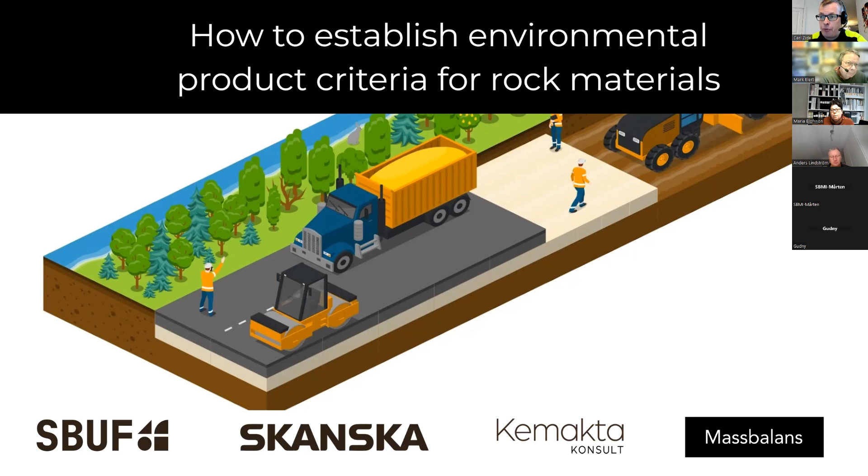And today, this project that Mark is heading under the guidance of Skanska is about creating environmental product criteria, a risk model for this, and that's the topic for this meeting. This is kind of a Nordic outlook, and we would like to invite our colleagues in other countries, and we are very pleased to have kind of a dream team when it comes to risk assessment. We have Jussi Reinikainen from the environmental institute,

what we call in Sweden the environmental agency. And we have Timo from GTK, in Sweden we call it SGU, or equivalent in Norway and Denmark. And then we have Gudny from Norway working at NGI, the Geotechnical Institute there. And we have also Ole Hjelmar, who is from the Danish Waste Solution Company, but he is very famous for driving the European end-of-waste efforts in the early 21st century, 2005 to 2013 or something like that. So we are very pleased to have a great team that will guide us through this day, and they will also do some introductory presentations about how they view this topic.

So here are the questions that we sent out, and of course the conversation is open and we can direct it the way we please. But it is to establish a risk assessment model for a specific product. Rock material is what we are aiming for, but other products could be beneficial to discuss if we have experiences from them that could help us with rock materials. And also to investigate and define the specific product, the use case, the characteristics, etc. After that, we have other questions that could be interesting, such as the longevity, end of life of roads, the placement of those roads when we have a common recipient, and what happens when disaster strikes, when we have a mud disaster like we had on the west coast in Sweden.

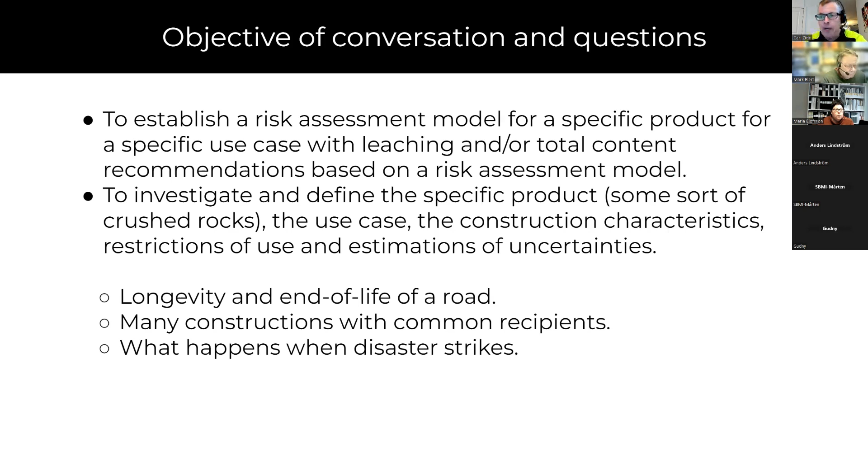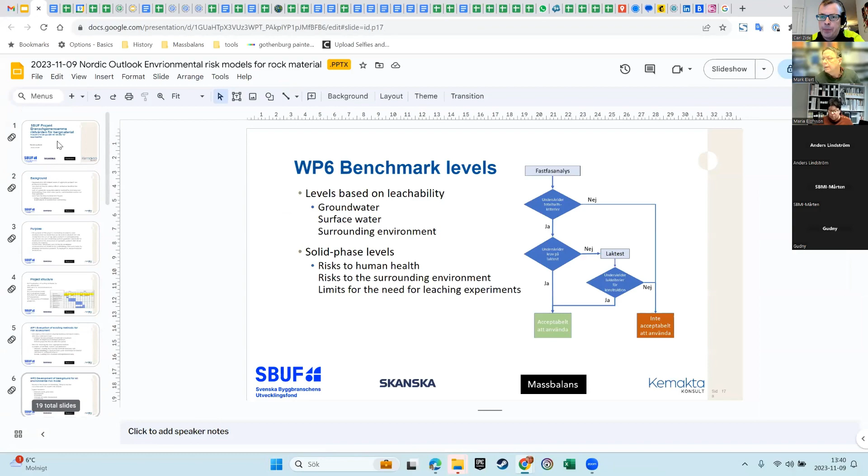So we will start with Mark and Malin, who will do the first presentation. And then we follow this list. We are open to questions and remarks during the whole conversation, so if something is unknown, please bring it up at once, so you don't sit and wonder. So Mark, I think you can start. Malin is hopefully joining us later on. So I will change to your presentation. And that is here, from the beginning. Please, Mark, and please introduce yourself as well. I haven't done that properly. Your microphone, please.

Yes, I'm Mark Elert from Kemakta, and I think I have met most of you, at least on Zoom. I work at Kemakta, and I'm trying to do the hard work, developing the model and the values here, with help from my colleague Karin Norrfors, who has also been working with this type of questions before. A few words about the project, because Malin is not yet in. No, Malin told me that if we can do it instead, that would be great. Would you like to do that, Mark? Yes.

A little bit of background. Approximately 100 million tons of aggregate products are produced in Sweden annually. And it's of course important that the use of these products would not give negative effects for human health or the environment.

Unfortunately, there is a lack of a generally accepted model or method for assessing the risk of using these types of material. But we know that this is a methodology which has been used in other areas, for example, in waste disposal and contaminated soils, which are similar, but not fully applicable directly to the kinds of things we are dealing with here. And as Carl mentioned, there has been a project testing various types of rock materials, which is, of course, a good basis for this project.

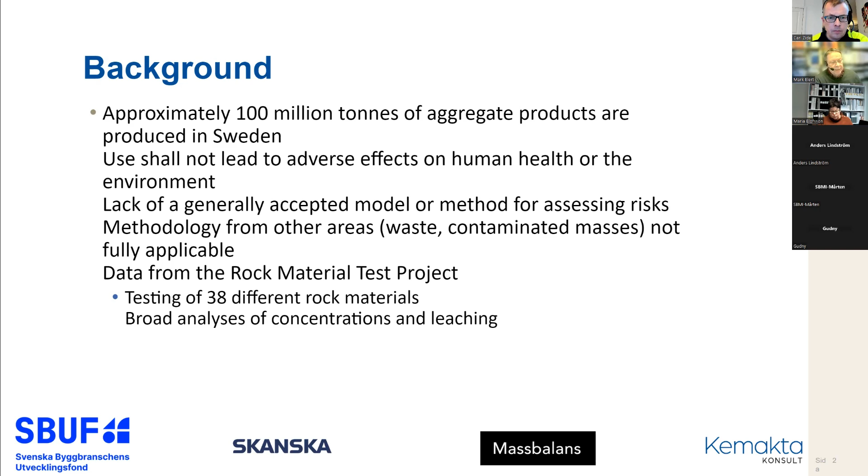We have tests from about 40 different types of rock materials. And from these tests, we have a broad analysis of concentrations and different kinds of leaching tests which have been done. And we intend to use that as a basis to see really how this material will act when it's used in constructions.

So what we want to achieve is to develop an industry-wide environmental risk model that can then calculate risk using these aggregate products in various civil engineering aspects. In the project, what we want to do is to have some uniform guidelines and levels for the environmental risk assessment that can then be used by the industry and also, of course, accepted by the authorities.

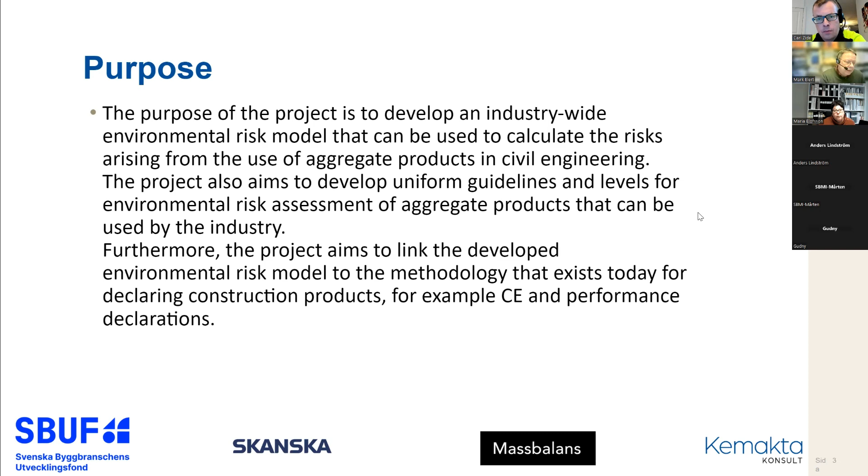And we also want to develop a risk model that should be connected to the methodology that exists today for declaring the safety and usability of construction products, for example, the CE marking and the performance declarations. So we're heading for some kind of product that can be used as a product. You can take the next one.

The project is divided into 7 work packages. And we have a time schedule which will last until a bit into 2024. And we have a reference group which will have regular meetings, and there will also be preliminary reports at various instances. And we also have this project group who have regular meetings discussing the progress of the project. Going a little bit more into the content of the various work packages, you can take the next slide, Carl.

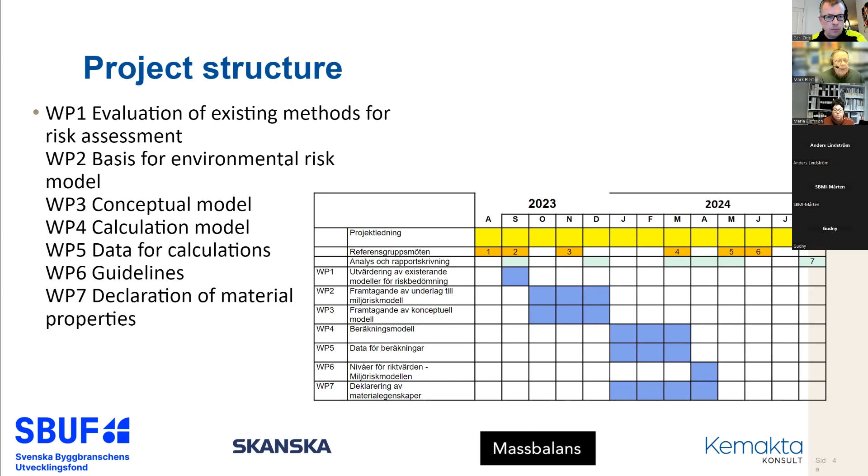The first work package is basically what we're doing now. It's an evaluation of the existing methods available for risk assessment, describing the current status based on literature studies, interviews, and a workshop like this. And what we're interested in is methods for risk assessments of various types of materials in structures, models for how chemical substances are leached and dispersed, and also how different material properties can affect this spread.

For example, many of these rock materials are rather large pieces of rock. It's not like a soil with very fine-grained material, and those things we believe can be important to look into in doing this model. And what we want to do is to find some basis for selecting the most appropriate method for our purposes, something which is complicated enough to answer our questions, but not too complicated.

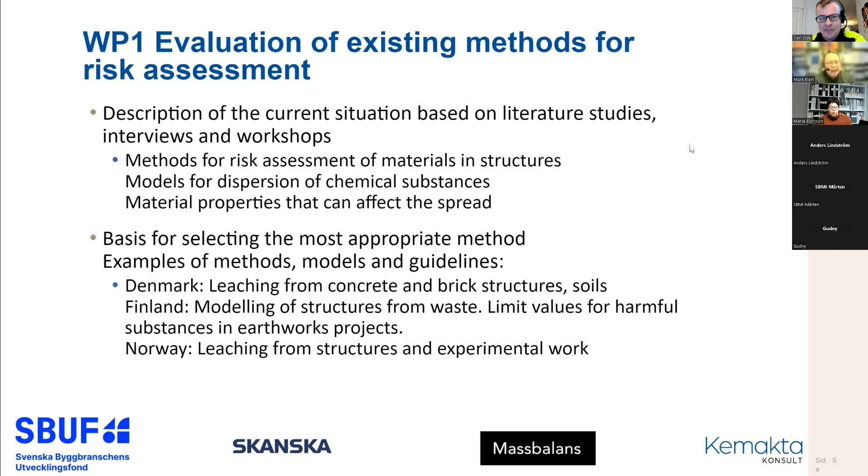And of course, we know that a lot of work on this has been done in the Nordic countries, and that's why you are invited here. You have been looking at various types of waste in various ways. So I think we can have some valuable exchange of information here today. You can go to the next slide.

Then, of course, we need a basis for this model, and to look at how to really, in a broader sense, choose the methodology we want to use. For example, what type of scenarios are we looking at? What type of materials, what type of constructions, what dimensions, how is water dealt with in these constructions, because that can be an important pathway for transport of substances, and also what does the environment look like where this construction is placed.

And of course, you could find a multitude of different scenarios, and we are not able to look at all of these. But since we are trying to develop guidelines which would cover a lot of situations, we will look for typically rather critical scenarios where you have large constructions, etc., and perhaps a somewhat more sensitive environment.

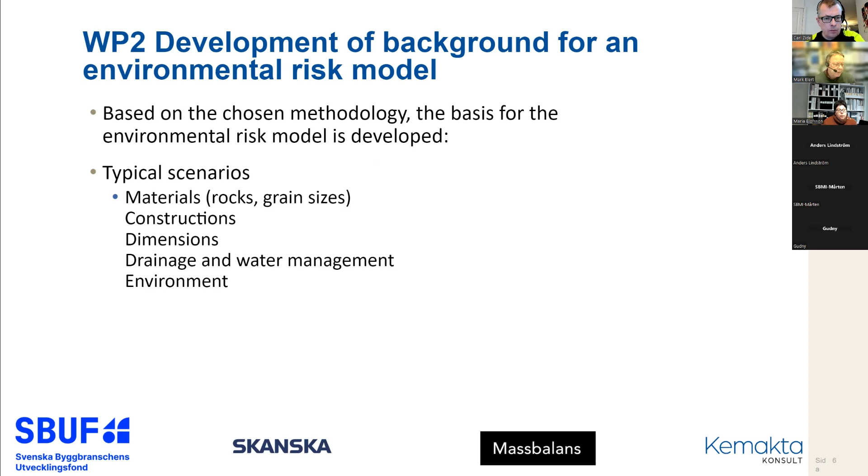And this work has been going on. The next thing is then to develop a conceptual model that we want to use. And we want to take into account, of course, human health, but also soil environment, and of course, protection of groundwater and surface water. And look at different pollutant dispersion processes and exposure pathways.

And I don't know, I cannot point, I guess. No, sorry, I can, please.

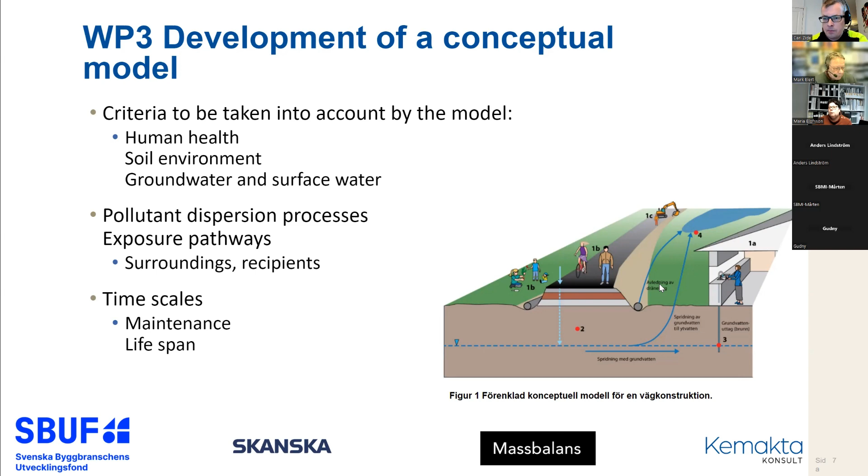And what is also important, of course, is the time scales you are looking at. You are looking at the entire phases. We are trying to look at the construction phase, the maintenance phase, and also the entire lifespan, and to some extent also take into consideration the final destiny of this road. It might be removed or something might happen with it, which we need to include. You can take the next slide, please.

And when we have this conceptual model, this has to be converted into some kind of calculation model. And there are, of course, a lot of models developed for risk assessment. And what we want to do is to have something which would relate to the risks connected to the total content of various substances in these rock materials. But we also want to take into account models which consider leaching, and the effects that can have on groundwater and surface water.

And the choice and setup of this calculation model will be based on what we have in the conceptual model. And for the total content, we are working with a hypothesis to use the same methodology, perhaps not all the exposure pathways or the same parameters, but the basic structure of the Swedish Environmental Protection Agency's guideline model for contaminated soils. And then we need to develop a leaching model, taking into consideration time-dependent leaching, transport, and dilution, which is more advanced than what is used in the Swedish EPA guideline model.

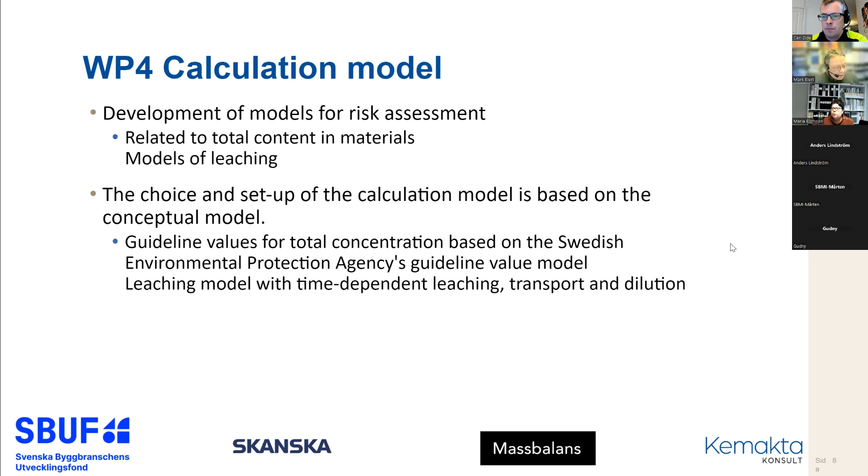How am I with time, Carl? You are fine. I'm fine, okay.

So we need a lot of data. We need data on the rock material, where we have this information from the Berg material test project. We need information about the construction, where Skanska has a lot of experience in building constructions like this and knows exactly the different dimensions and what type of materials are used in different places in these constructions. We need something which deals with the conditions for leaching and the conditions for spreading of these substances. So we need to make some typical scenarios with groundwater levels and groundwater flows, etc.

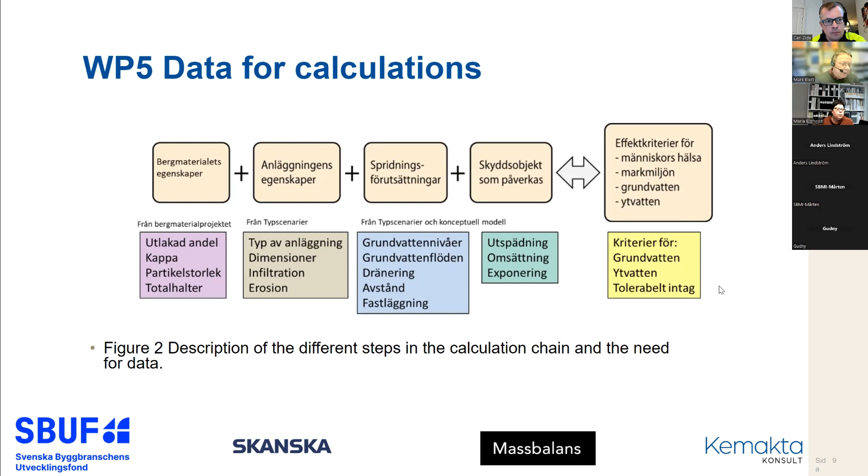And we also have to know something about what we want to protect, what are the relevant types of objects that need to be protected. For example, people living nearby, or the groundwater and surface water. And then in order to base these calculations, we also need to find some criteria for what effects are acceptable for human health, groundwater, soil, and surface water. And there is, of course, a lot of information about that already. So this is the basic setup.

And what we have done so far is we have been looking at 4 different designs. One is what we in Sweden call the 2+1 road. That is a 2-lane road with changing overtaking lanes, where you have a paved surface, and we have assumed a stretch of 2,500 meters and a width of 16 meters and some thickness. We also have a larger impervious surface, asphalt covered, more or less impervious. We also have the same size of surface, but with a gravel surface. And also we have been looking at what happens if you have a stockpile of material, so you have the same area covered, but with a greater thickness. And the idea is that all of these have the same area. So we are basically looking at what the other parameters would affect.

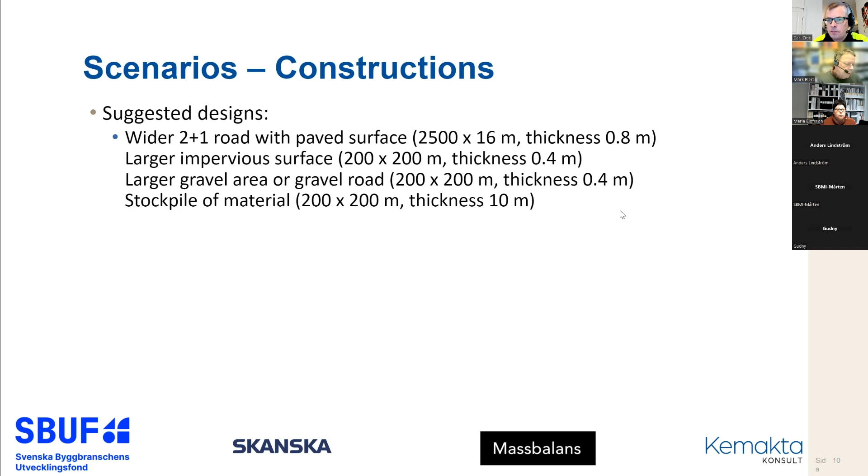And so far we have been using what I call here the Swedish TAC MRR model. MRR is basically what levels constitute a negligible risk in Sweden. And this is the model which has been used to calculate the leaching values for that. It's rather simple and rather conservative, but it's easy to use. So it gives some idea of where we will end up and what things are important. So what we have done is change the dimensions used in that and change a little bit the infiltration rates because we have paved surfaces. We have also made some changes in the flow in the surface water recipient. But basically the other parameters are the same as in the calculation of these MRR values.

But one should remember that it's very conservative. For example, it assumes that you would have protection of the groundwater directly in contact or directly bordering the construction. You would basically put your groundwater well for drinking water just on this roadside, which is probably not a good idea. And it also assumes a very rapid mixing in the soil layer in the construction. And it also has parameters for leaching which are not adapted to the rock material.

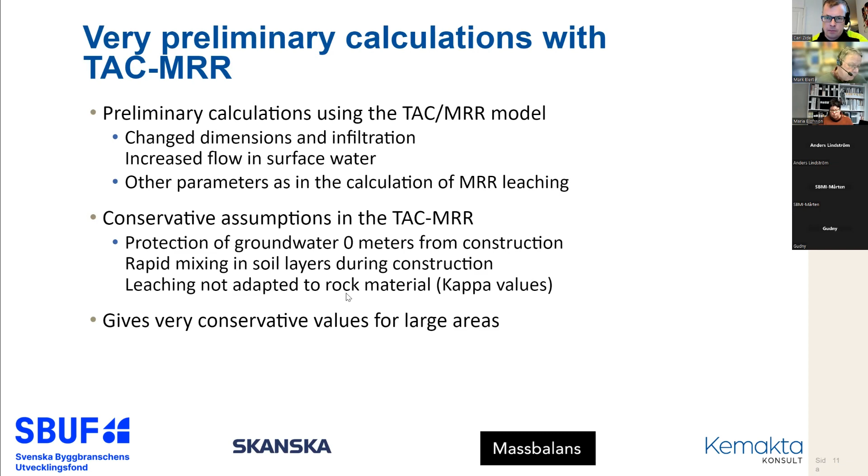We have a lot of information to process from this Bergmaterialstudie, which we have not yet done, which gives some interesting information, and it seems that the leaching is not working exactly the same as is assumed in these types of soil leaching models. So it gives rather conservative values, especially for large areas. You can take the next slide.

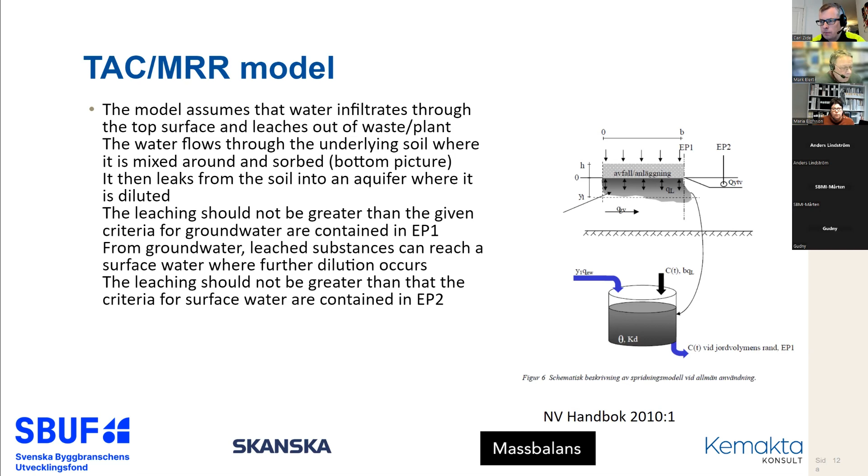And you are looking at what we call control points. The first one, EP1, is directly below, downstream of the construction. There you should uphold the criteria for groundwater, and then you have EP2, which is in the surface water where you have further dilution, and there you should uphold the criteria for the surface water. And the next slide

is the input data we have. I've shown you the dimensions before, but basically everything is the same. We have a density of the rock, which is usually higher than that of the soil material. The density of the soil is the density below the construction. And here we have a groundwater flow, an infiltration rate, which for the paved surfaces we assume 50 millimeters per year. For the graveled surface, we assumed 200 millimeters per year, and for this storage of rock material, we assumed 300 millimeters per year.

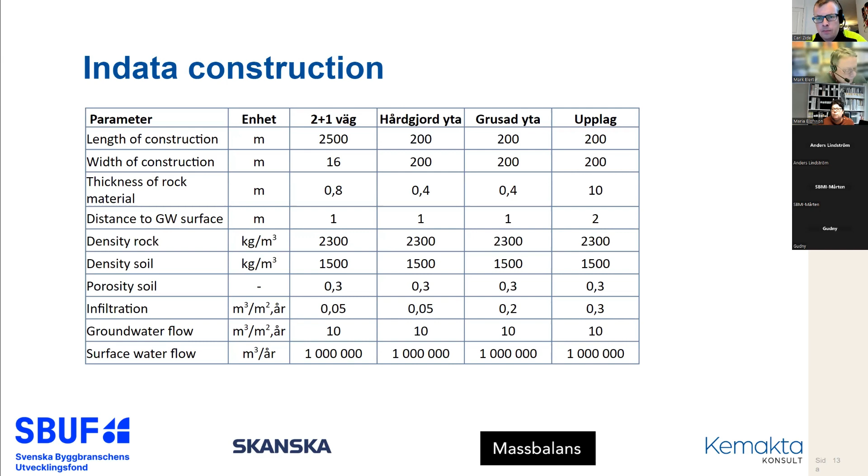And we also have a surface flow, a rather small creek, which has a yearly flow of 1 million cubic meters per year. I think it's about 30 liters per second or something like that. So it's a rather small recipient we are looking at here. But as I said previously, these are just preliminary calculations. And you can take the next slide.

And concerning, we're looking at the various types of heavy metals, and we are using the same KD values. That's the values determining the amount of sorption in the soil below this construction, and that's the same values as have been used for calculating the Swedish MRR values, and also these kappa values, and this is a parameter that determines the rate of decline in the leaching.

The whole thing is based on the amount of leaching declining exponentially with time, and this parameter is used to calculate how fast this decline is. The lower the value, the slower the decline will be. The higher the value, the faster the decline will be. And then the various criteria used for groundwater and surface water.

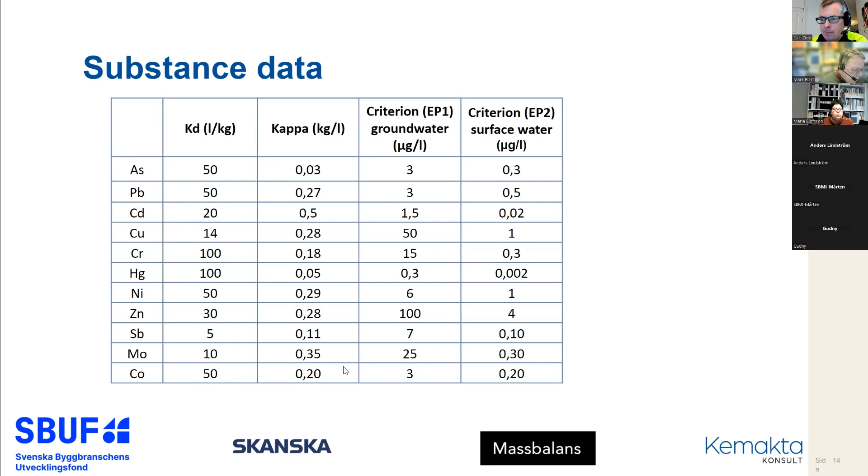So in this slide, you didn't use our figures. These are the European figures, aren't they? Yeah, that is the landfill directive actually. This KD is not the KD of the rock material? No. It is the KD of the soil. Got it. But the kappa is not taken from the big study. So it might be more interesting to see that. And you can take the next slide.

And this is some of the results we have got. What it shows is the maximum leaching allowed in order to protect both the groundwater and the surface water. So we are looking at both in parallel, and the most stringent criteria is then used as the total criteria. And it is the 4 cases we have studied: the road, the paved surface, the graveled surface, and the storage. And the last one is the value used for this negligible risk.

And you can see that in most cases, you have higher guidelines for these types of materials, except perhaps for the storage, where you have quite a lot of rock.

And of course, if you then assume that you have a well just at the side of this storage, it's not that surprising that you would have some kind of effect in that well, but it's of course not a realistic situation. You also see that in many cases the road gives higher values than the surfaces, depending a little bit on how the dilution comes from the road. There is quite a small difference between the paved and the graveled surfaces, which is of course interesting.

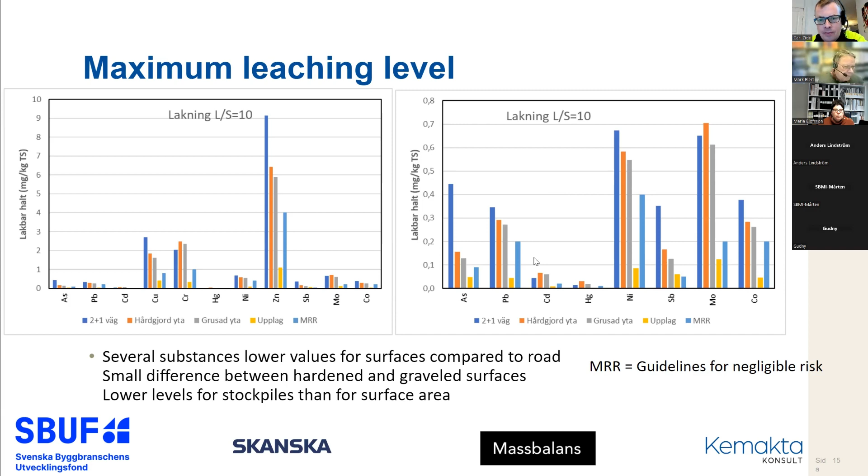So I think you can skip the next one. It's just a table. And then one of the benchmarks is, of course, leaching tests are becoming more and more standard and are not extremely expensive anymore, and most labs do them, but they still take some time, and that you perhaps do not have. And also, we believe that doing leaching tests on materials which have very low total content is kind of a waste of

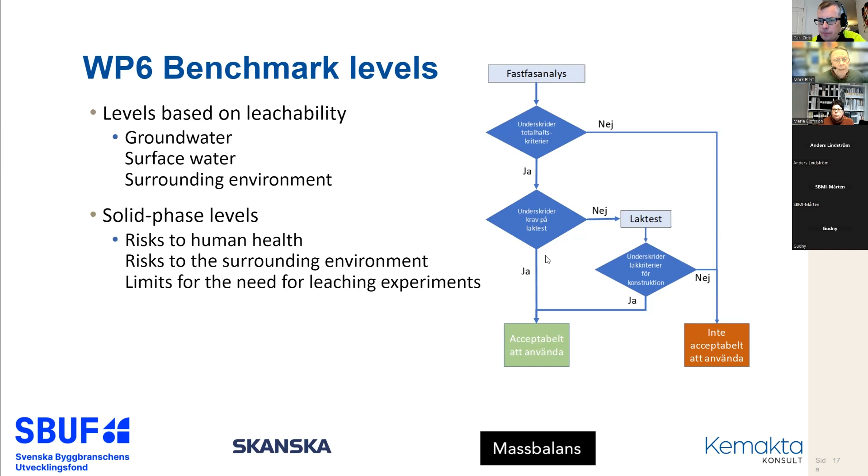money and time. So the ambition is then, using these tests that have been done on soil material, to see if you can find some kind of criteria for when you would have a high risk that the leaching would be important. And if you exceed that criteria, you then perform the leaching test. But if you're below that criteria, you would accept the usage of this without problems. So it's a way of simplifying the process.

So, of course, models and values are very nice to have, but you need to put them into a framework. And if you want to make a product of this, you need also to prove and show to your customers that you're living up to that. So in this last work package, we are looking at how to present this in a good way, so that the users of the methodology and the producers of these rock materials can then easily use it in their business.

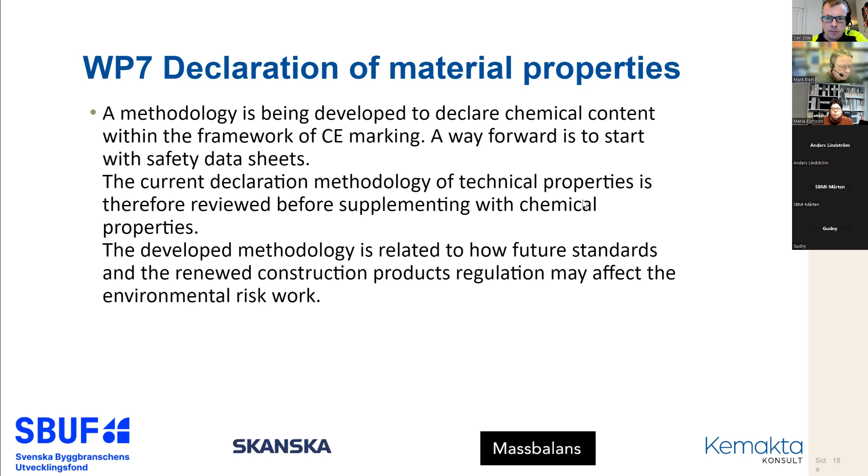And also you can, of course, put some limitations on how to use it, because as you do with normal products, you can prescribe intended uses of these materials, which would help to limit some of these more extreme possible uses. So this is the basis, and I think the outline of this project is very similar to other projects.

So what we are looking for, and perhaps would like to have your input on, is your experience of looking at conceptual models, types of structures and materials, and also what kind of scope you have in your calculations. Also, to what degree you include different protections or actions for safety, which are, for example, done during construction or during maintenance of a road.

Timescales you have been looking at, and also the problem that Carl mentioned previously, that usually these models look at one construction and one recipient, and how that construction could affect that recipient. A problem you have, especially with structures with rock materials, is that you have not only one construction, you have many roads, many parking lots, etc., which affect the same recipient, and how to deal with that problem. And also how to deal with more extreme events.

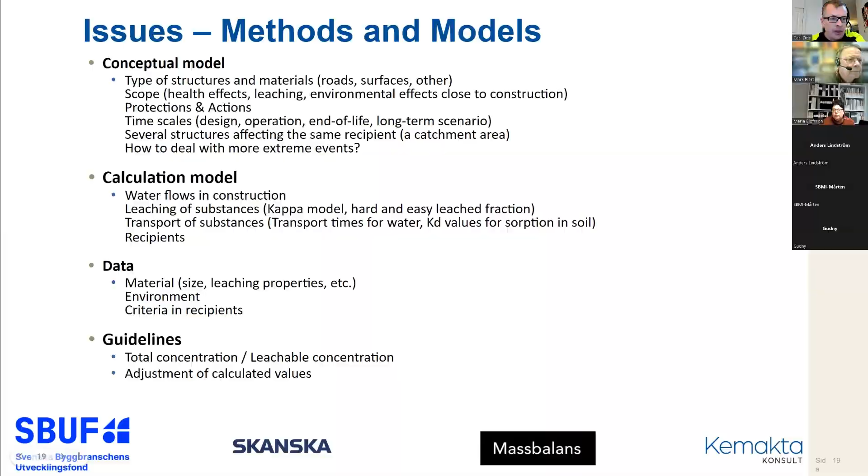Thank you so much, and unfortunately I didn't send my presentation in advance, but I hope I can share my screen and show it myself. And I hope you don't mind if I switch off the camera. No, that's fine. I'm a bit worried that my connection is not stable enough. So happy to be here and see you and hear you. And please present yourself as well, because you are kind of a key person in this group. Of course, all five are, but we have been looking forward to the Finnish way of thinking. You are more advanced, you have more regulations and more guidelines than we have in Sweden. So please describe yourself. Well, we can discuss whether that will indeed be the case. But just to ask, can you see the full screen now? Yes, perfect. Okay, perfect.

Then we have the MASA decree, which is about the soils from construction activities. Unfortunately, yet again, it's not finalized. We've been working on this for years and years, and there have been all kinds of issues. I don't want to go into the details, otherwise I'm going to get so frustrated. But nevertheless, it's supposed to be about soils from construction sites, site remediation, and so forth. Basically, soils that have some kind of hazardous or potentially hazardous properties, mainly containing contaminants, containing waste materials, or containing acid sulfate minerals. And we defined that it includes all kinds of soil and rock materials, including stabilized soil, dredged sediments that will be reused on land, used gritting sand, railway ballast, and so forth.

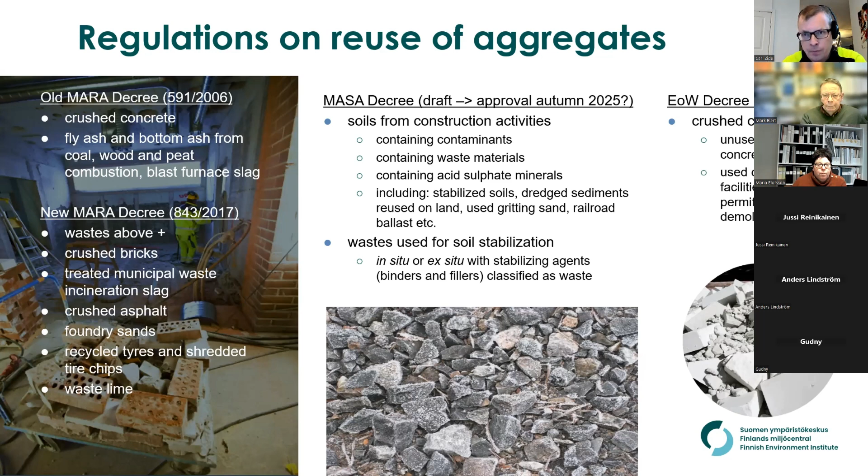And it also is about to include certain types of waste used for soil stabilization, either in situ or ex situ, for example these MARA ashes, which have been used for stabilization quite a lot. And then we also have this end-of-waste decree from last year, which is given for concrete, both unused concrete products and used concrete, but it basically applies to facilities with environmental permits. So basically, these kinds of demolition projects are excluded from that decree, but they are included in the MARA decree.

So I'll start by telling something about the MARA leaching criteria. The old criteria were based quite directly on the waste acceptance criteria for the inert waste landfill. And Ole is here, so it's great. He knows everything about this. So I'll just briefly go through this.

Those leaching limit values, measured in our case as LS ratio 10, were based on the modeling of the EU TAC working group, which Ole, I assume, was kind of responsible for, using a numerical modeling approach. So first there's the modeling of the source, the landfill and the leachate there, and then that's transported into the unsaturated zone, and then to groundwater, and at the last stage there's a compliance point in groundwater, and the concentration there should meet the quality standards for drinking water.

And the final values were calculated or partly adjusted, mainly upwards, based on political agreement. And as I mentioned, our old criteria were classified into two categories. The first category was meant for constructions or applications with permeable cover, and those criteria were set directly based on the inert waste acceptance criteria for both of these waste streams. The second category was for applications with low permeability pavements such as asphalt. For concrete, the same values were used, but they were increased threefold for the ash.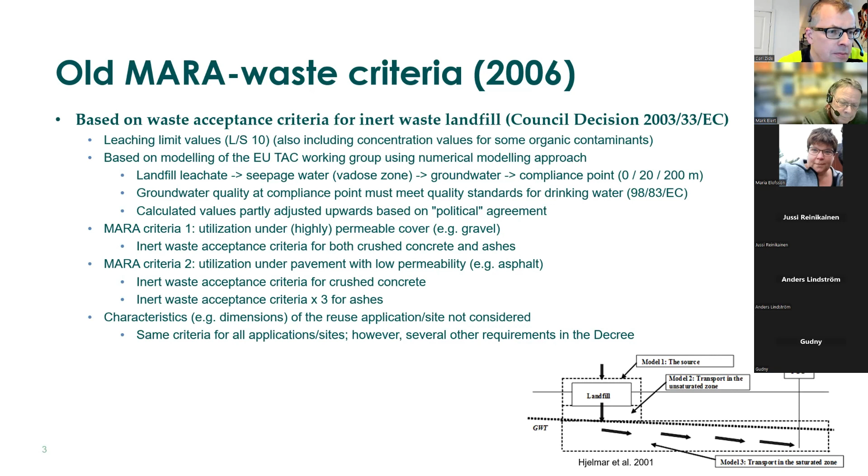And of course, some other characteristics of those constructions or applications, such as the dimensions, were not considered at all at that stage. So the same criteria applied to all sites. And there were some other requirements in the decree. But the newer MARA decree had the same kind of starting point: leaching from the waste, then the groundwater impact with high and low permeability cover. But in addition to groundwater, we also look at the impacts on surface water, and to some extent soil was also considered.

And we had three different applications: road application, field, and an embankment, such as a noise barrier, and also a specific gravel road structure. We defined the dimensions for each application and other parameters, and the cover materials were included in the water balances. We also looked at stabilization, but it's actually for the soil decree, not the MARA decree.

And we wanted to develop this modeling tool in Excel, so that it would be easy to use, quick to use, easy to understand, with reproducibility of the modeling exercises. And we also thought this tool might be used for case-specific assessments in environmental permit applications or projects like that, so we could give it to other stakeholders. The formulas and parameters we based on a literature review.

And again, I want to mention that the risk-based calculated values were not exactly the same as the final acceptance criteria, as Marco was referring to in his presentation. These calculated values were partly adjusted downwards or upwards, considering mainly the leaching data from different waste materials that we got from the industry and other practitioners. We also used an upper limit for the leaching, a maximum leaching based on the non-hazardous waste landfill criteria, which we didn't want to exceed.

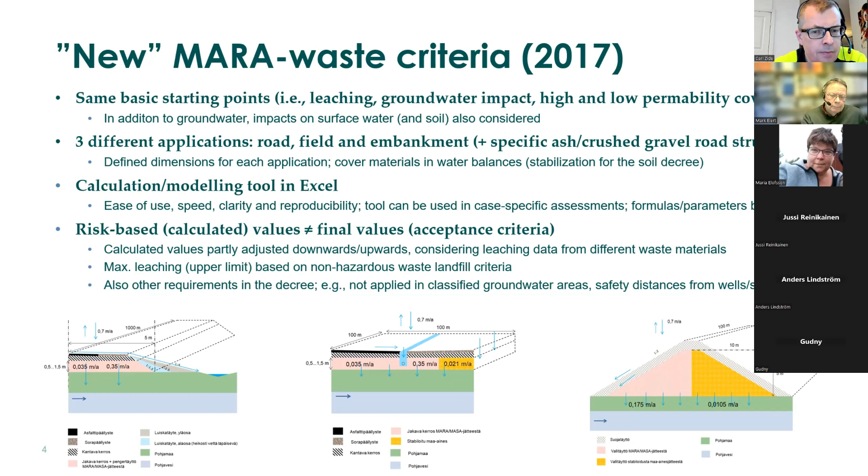And of course, there are also other requirements in the decree. For example, it's not supposed to be applied in classified groundwater areas, and there are safety distances from wells and surface waters and so forth. But I've been talking mainly about the leaching criteria. In the stages of the calculation, there are a lot of similarities with the EU TAC landfill acceptance criteria calculations, using mainly the same concepts and approaches, and assuming equilibrium conditions.

So first, coming up with this initial concentration using these EU kappa values, the updated ones from the Netherlands, and then deriving the concentration reduction in relation to these maximum concentrations in the seepage, so at the bottom of the vadose zone, and also in the groundwater. And we considered the source was kind of like a diminishing or shrinking source, but we didn't use the kappa value there when we were modeling the source, because we wanted to be a bit more conservative, so we used this mass balance approach.

And the seepage flow velocity in the vadose zone was based on annual infiltration, so a very simple way of describing the situation. And the concentration at the bottom of the vadose zone was calculated based on an Ogata-Banks sort of time-dependent equation. And the attenuation factors that we considered were dispersion, retardation, and biodegradation for some of the organic contaminants, both in the vadose zone and the aquifer. And there's also the dilution factor, so mixing of the seepage in groundwater, and also down gradient of the application there's new infiltration before the point of compliance, so there's new mixing there as well.

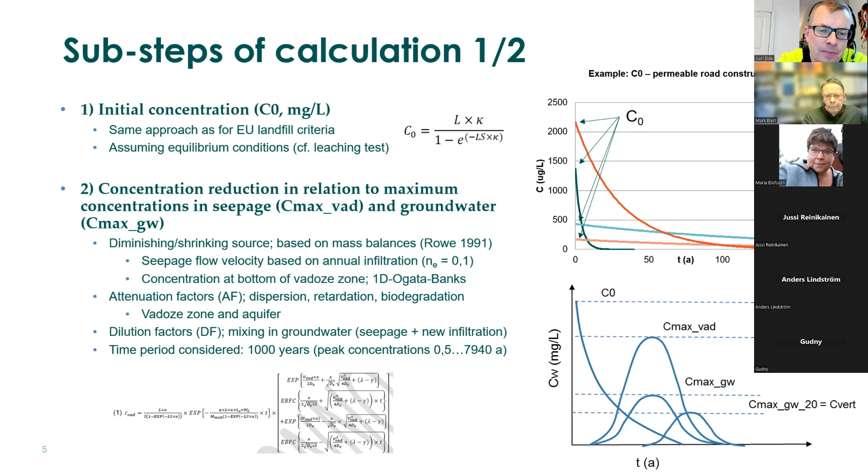And the time period that we considered was 1,000 years, and the peak concentrations, depending on the contaminants, were calculated to occur from half a year to almost 8,000 years. And on the right-hand side, you can see the model of the structure, and also how the concentrations decline within the migration route.

Then the third stage was estimating the maximum initial concentration at the source that corresponds to the reference value at the point of compliance. So taking into account the attenuation, taking into account both groundwater and surface water receptors, and using drinking water standards as the reference concentrations for groundwater and environmental quality standards for surface water. And based on this calculation, the surface water was the critical receptor in our case only for copper and zinc.

And then at the last stage, the leaching limit value was back calculated to correspond to the maximum initial concentration at the source. And here, once again, we used the updated EU kappa values and the approach as in the case of calculating the initial concentration. And we also needed to use some kind of iteration at this point to achieve a stable value for this diminishing source due to some of the constraints in this deterministic Excel-based modeling approach. So there's no direct solution for this analytical solution.

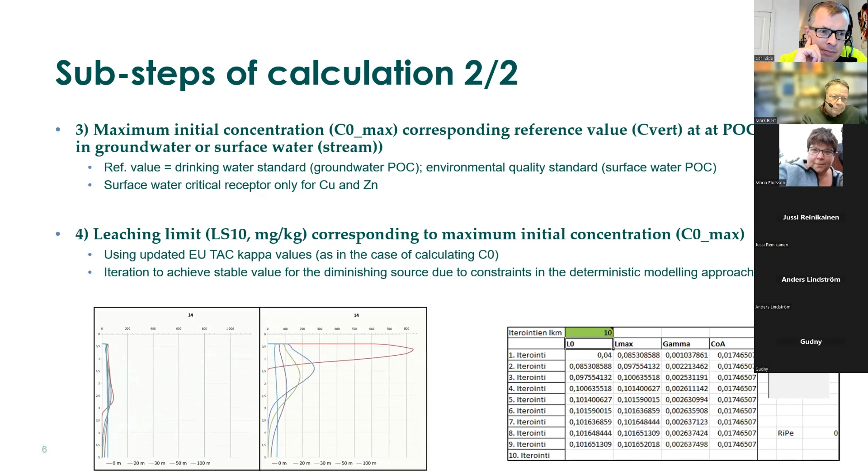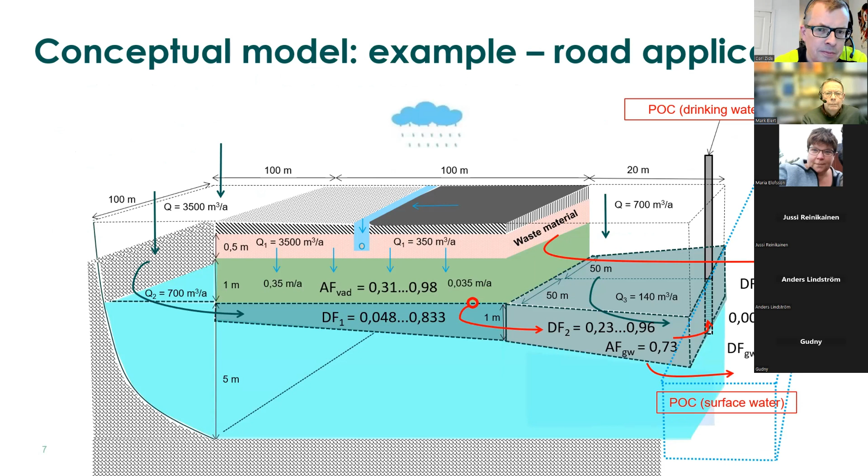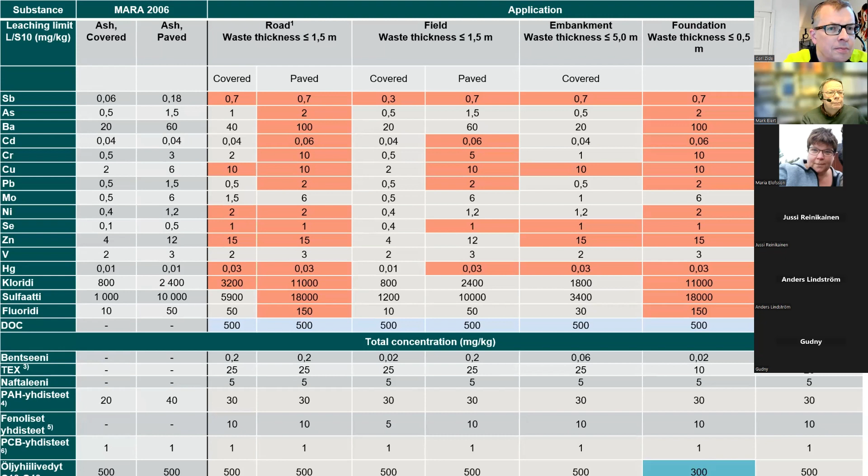So it had some constraints. And this is just quickly to say that these are the kind of conceptual models we used. This is an example from the road application, you see more or less all the parameters that were considered, and then coming up with the final value for the leaching. These are the values you can see there. I think the red ones are describing the upper limits, so the risk values would have been higher.

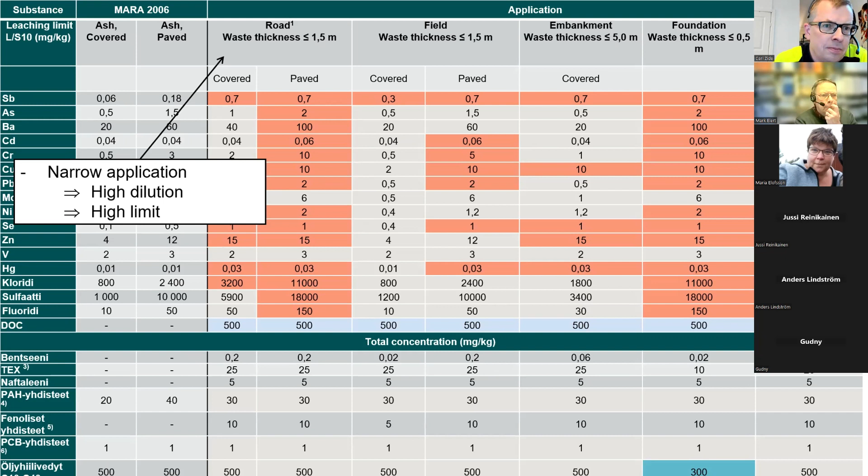And I have to say that there was attenuation evaluated in the vadose zone and in the groundwater, but in this very simple approach, the dilution in the groundwater actually is the main factor in the concentration reduction. Of course, the vadose zone attenuation also has some effects. But if we look at, for example, narrow applications such as the roads, there's high dilution. We were considering the flow rate perpendicular to the structure, and the point of compliance was at the plume center line. So we didn't take the lateral dispersion, for example, into account. So high dilution for narrow applications and therefore rather high limits.

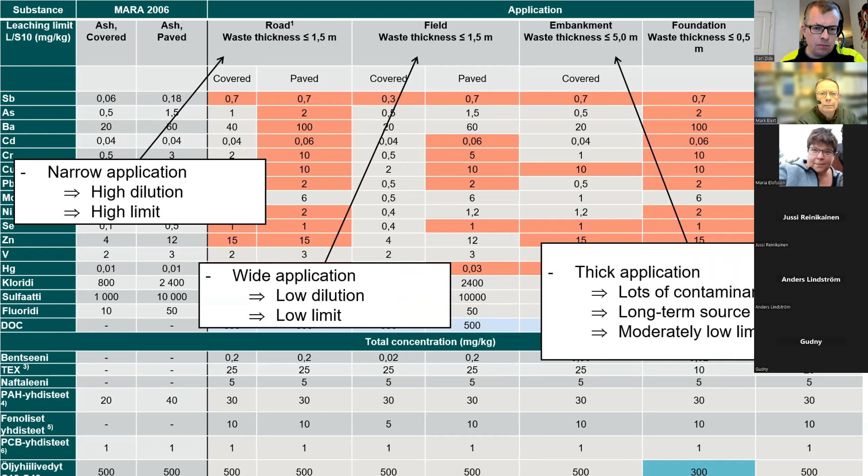On the other hand, wide applications such as field type applications, parking lots, whatever, 100 times 100 meters was the surface area. Low dilution, low limit. And then thick applications, so lots of contaminant mass, meaning a rather long-term source, I would say moderately low limit.

And we got some criticism for this approach, and I know that it's by no means perfect. I'm not really advocating this approach to you, but we had our reasons to do it this way. But still, we wanted to try to find out whether these rather simple deterministic modeling approaches can do the trick. So we were comparing our results with the EU TAC landfill acceptance criteria calculations.

Of course, not all the parameters could be made similar because the approaches are different, but as long as that was possible, we tried to do that. And if we, for example, look at that option where there's the rather low groundwater flow conditions and the thin vadose zone, and then we compare the results, you can see that the greatest difference between those results was twofold, and for many contaminants, basically you get the same result, even though that was a totally different modeling approach and numerical modeling and so forth.

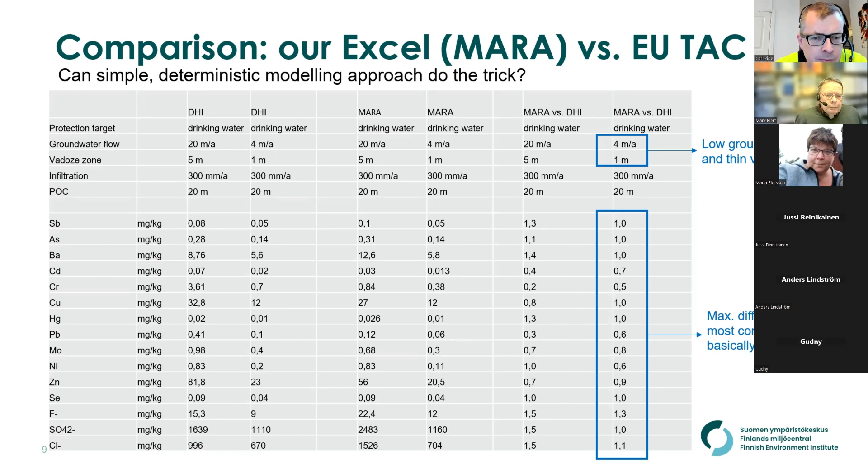So I would say, based on that comparison, that this kind of approach at least might do the trick. Whether it is realistic or not, well, that's another question.

Then quickly about the soil decree, which really is a draft yet. We have been thinking about using the same leaching limits as for the MARA decree I just showed you, but including here the values for the stabilized soils or dredged sediments. And of course, with the stabilization, you have a lower infiltration, and it means that the risk-based values, due to the time-dependent migration, got really high, not necessarily reaching the point of compliance in the time period we were looking at. So mostly those values are based on the so-called upper limits, so the non-hazardous waste landfill criteria.

And these leaching tests, we have been thinking that, okay, we tried to do some of the diffusion tests, and it's very difficult to interpret the results and it takes time. So I think it's probably a bit more practical to use the same type of batch or column tests, but then of course you have to do these kind of pre-stabilization tests first, then crush the sample and then do the leaching test. But nevertheless, this leaching test is to be done on the stabilized soil and sediment, not on the waste, as in the case of the MARA decree.

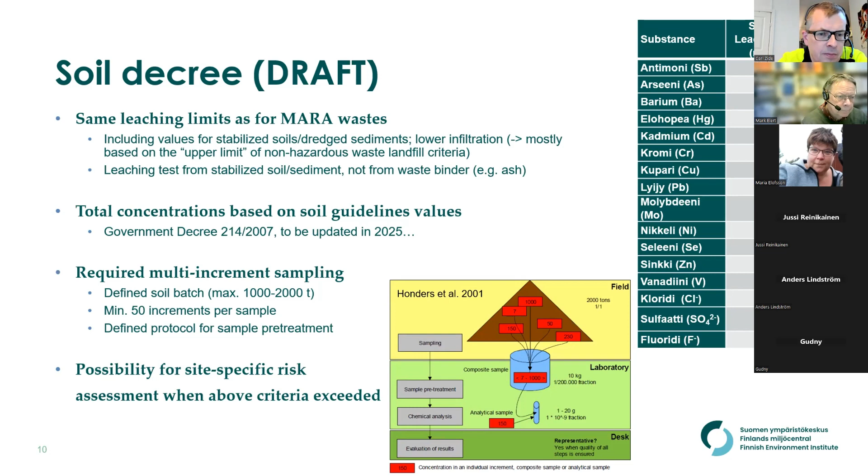We're also going to be issuing total concentrations, likely based on our soil guideline values, which are given in another regulation, but those will be updated in 2025. And of course, there are also a lot of other requirements in that decree as well. For example, required multi-increment sampling, first defining the soil batch to be reused, a maximum amount for that, then taking at least 50 increments per sample, and having a defined protocol also for the sample pre-treatment and so forth. But we also try to include a possibility for site-specific risk assessment within the decree in cases where these criteria will be exceeded, to make it more flexible and reasonable in some cases.

Just shortly about the waste leaching criteria for the crushed concrete. Once again, we were using the same procedure as for the MARA decree, but here assessing only the leachate or pore water concentration at the source to be conservative enough. And we had lots of discussions, but nevertheless, we tried to come up with a rather conservative approach here. So first, estimating the maximum leachate or pore water concentration at the source that corresponds to the reference value, which again was the drinking water standard, and then again back-calculating the leaching limit value that corresponds to that maximum leachate concentration.

And again, these calculated values were not the same as the final values, and they were adjusted both downwards and upwards, considering once again the leaching data that we got from these crushed concrete samples, and there were quite a lot of them delivered by the industry. And based on that data set, most results, I think something like 85% and more, complied with these criteria. But now, after people have been applying it, some people are complaining that these values are too low. But then again, I don't know if they gave us wrong results then. They should have been honest with us in the first place. Exactly.

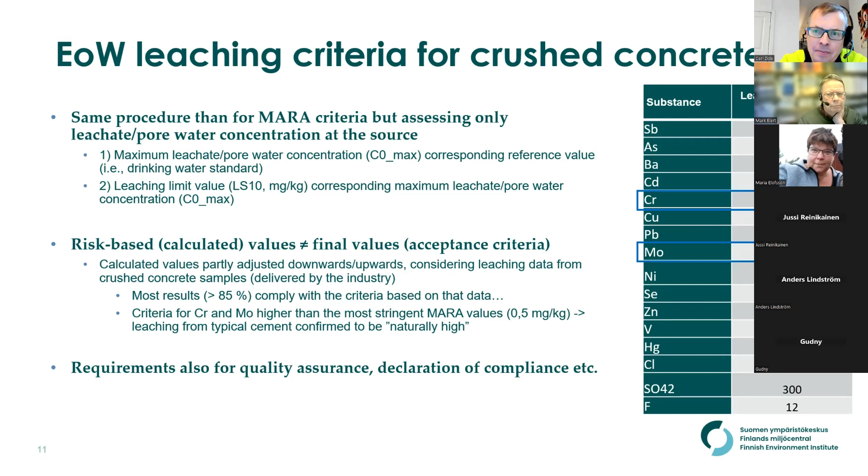If you look, just out of curiosity, at the criteria for chromium and molybdenum, they are higher than the most stringent MARA decree values. But as we looked at the data, it turned out that the leaching from typical cement, since it's a natural ingredient, was confirmed to be naturally high for chromium and molybdenum. So there are justifications to increase them. And of course, there are also other requirements for quality assurance and so forth in that regulation.

And as my final slide, I just wanted to give some generic requirements I think we need in order to move into the circular economy, especially in terms of the reuse of aggregates and waste materials. So first, what I think is really needed is setting clear policy goals on a national basis or regional basis or whatever.

So there really needs to be this political will, I would say, so that even the authorities have to kind of understand the benefits of this. And if you first set the goals, of course, then you have to manage the transition from the traditional linear economy to the circular one, and then moving from these policy objectives to targeted measures, the proper implementation, whether it's increasing knowledge, doing research, education, training, doing demonstrations, whatever is needed.

Of course, the regulatory basis needs to be valid for the task, actually supporting this, not only restricting it, and also on the industry side and practitioners side, improving and developing technical expertise and facilities, whether it's on treatment of these soil materials or waste materials, logistic measures, all kinds of tools, including risk assessment tools and so forth.

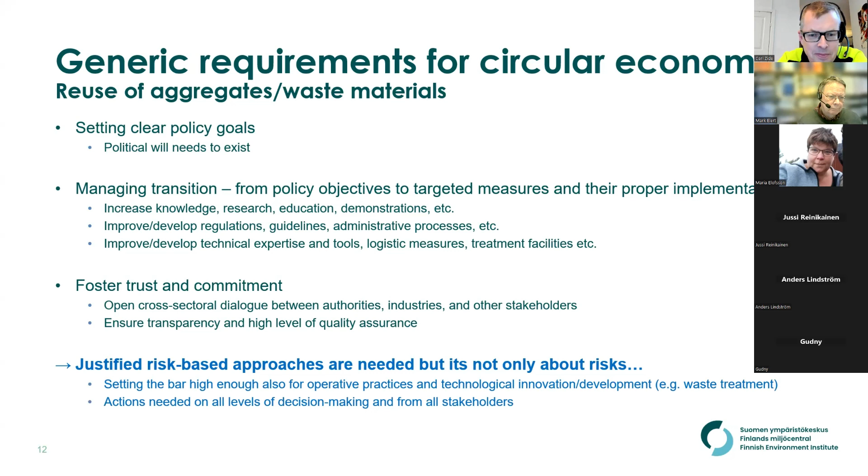And although today we are talking about risk-based approaches, I would say that justified risk-based approaches, models, tools are really needed, but it's not only about the risk. So we also would like to see that they are setting the bar high enough also for these operative and regulative practices, also trying to foster technological innovation and development when it comes, for example, to waste treatment. And actions most definitely are needed on all the levels of decision making and from all the stakeholders. So that's my very quick.

That's great. That's great, Jussi. I'm very pleased for that presentation. It was like a breeze. You speak even faster than I do, so that's great. I haven't been talking about this stuff, not even in Finnish and certainly not in English, for years and years, so I might have struggled a bit, but hopefully you got at least some ideas. You succeeded greatly in this presentation. Perfect. It was great, awesome.

Perfect. So I think we should continue logically and let Timo continue with the next step. Timo, welcome to the stage, and please introduce yourself. I saw you once on the website of GTK. So you are quite the man in GTK. Welcome. Oh, that's surprising. Thank you for inviting us.

I'm Timo Tarvainen, senior scientist from the Geological Survey of Finland, GTK. I've been working for GTK since 1986, with experience from many different kinds of projects. And I picked up some additional projects we have carried out partly together with Jussi's Institute. While Jussi gave you more direct input to your project, I might give you some additional ideas.

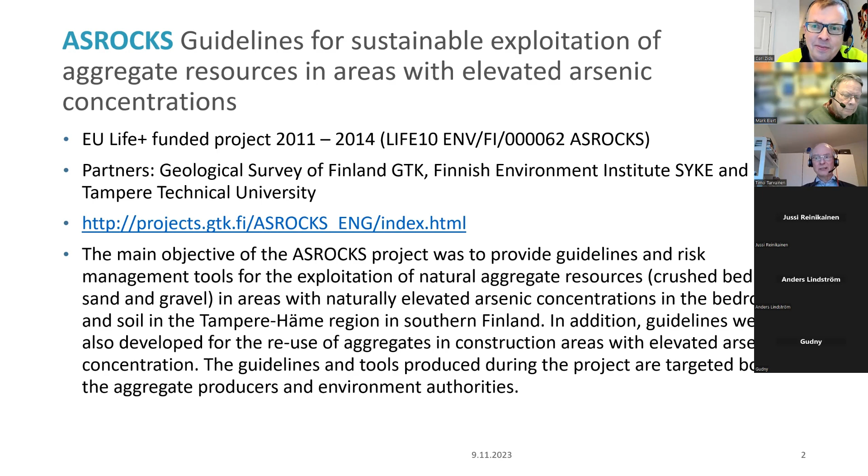And while your project is about using these aggregates in road construction or fields or something else, for ASROCKS it was to provide guidelines and risk management tools for the industry, for the exploitation of natural aggregate resources in areas with naturally elevated arsenic concentrations. So this was more dealing with how to work in the area where you are producing the aggregates. But we made some analysis, leaching tests of aggregate products as well, and that could be useful for you.

Our study area was the so-called Tampere Arsenic Province, southwest Finland, where we have naturally high arsenic concentrations both in bedrock and in soils. Originally, we had 21 preliminary investigation sites, aggregate production sites where we used crushed bedrock. There were gravel sites, and then we had a third kind of site: construction sites where people were building a house or roads or something, and there was short-time aggregate production.

Finally, we picked up 4 sites with highest arsenic concentration for detailed investigation. And as I told, the focus was on development of instruction for the producers. The highest arsenic concentrations were measured from those construction sites where you had short-time aggregate production. Because usually when you have a company who is producing aggregates, it selects rock type where you have big mass of technically good quality rock aggregate material.

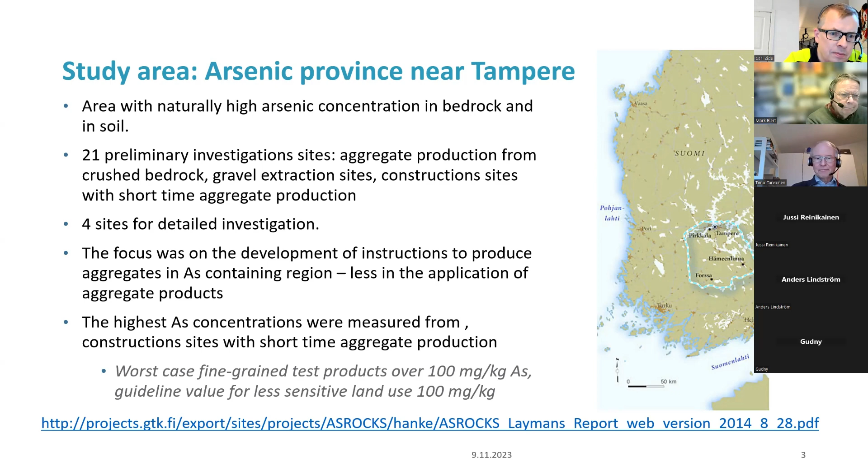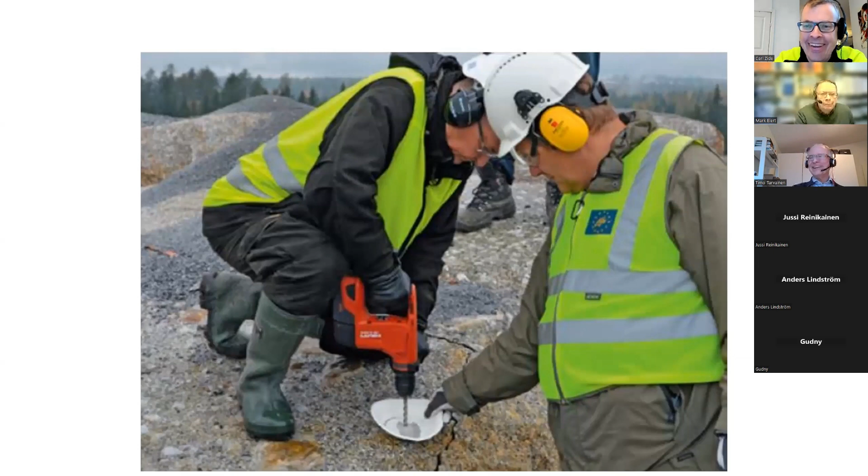But when you are just making a road and make a road cut and use the same material somewhere else, you might end up using a bit different rock type. In addition to aggregate products, we took samples from the rock itself before it was used, and this is our high technology sampling equipment, handheld drill and a paper plate, and that was a very easy way to get samples from the rock. Great.

So we selected some aggregate products which were analyzed in the laboratory. We analyzed semi-total concentrations using aqua regia. We used weak leaches, ammonium acetate, and we had 3 kinds of leaching test: standard column test, then a 2-stage batch test, and then a special test for chemical properties of aggregates, which was used 10 years ago. I don't know if anybody uses it anymore.

And these results, if you go to our website, which was on the first slide, you can download the report of the leaching tests, but that's unfortunately only in Finnish. But if Mark wants to have it, you can contact me and we can have a look together, because that might be nice to compare with your results of leaching tests.

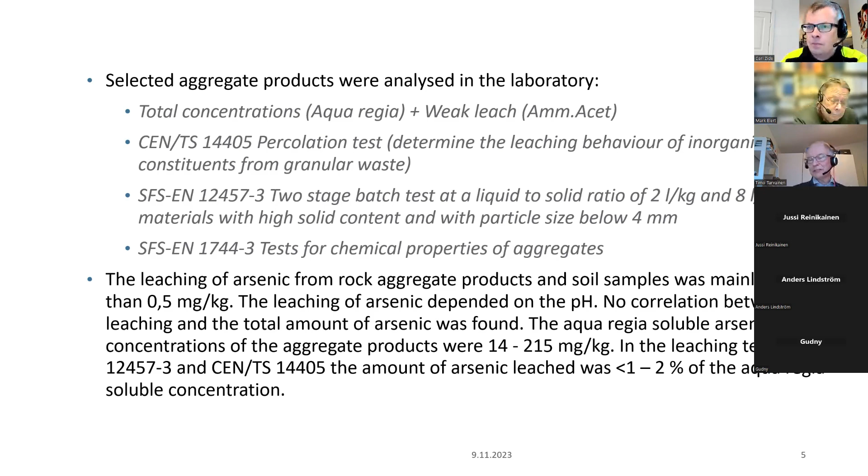Usually the concentrations in leaching tests were low, but we also measured leaching in different pH values, and that makes a big difference. So for arsenic, if you have very low pH or higher pH than normal soil, the arsenic leaching comes up with a very big difference. So that might be some additional information for you. Aqua regia soluble arsenic, so semi-total concentration, was 14 to 215 milligrams per kilogram, but what is leachable was only 1-2% of the total concentration. Okay, there were not so many samples as you had in your work.

10 years ago, we were thinking of CE marking and leaching tests, and we didn't develop any new specific classification for aggregate products based on arsenic concentrations, because according to the Construction Products Regulation, CE marking of an aggregate product should include information on technical properties and also dangerous substances. So the basic principle should be that those construction products from which dangerous substances might be released to soil or to groundwater or the surface should be tested.

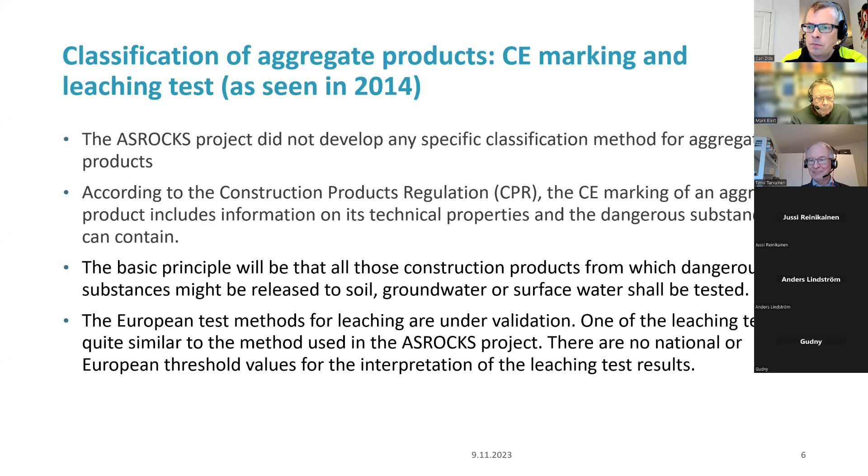And 10 years ago, our colleagues from Tampere Technical University told that the European test methods for leaching are under validation, and some of the tests were very similar. We tested in the ASROCKS project, but there were no national or European threshold values for the interpretation of leaching test results, and it might be that it's still valid 10 years later. Okay, that was the ASROCKS project.

Then I picked a totally different subject. We have a soil geochemical baseline map server called Tapir at the Geological Survey of Finland, originally also developed together with Jussi's institute, the Finnish Environment Institute. In Finland, geochemical baseline of soil is a combination of natural background concentration of metals in soil plus diffuse anthropogenic input, so atmospheric deposition or something like that on topsoil. We have a database which covers the whole country. We have natural soils, we have 12 towns, so urban soils, and we have focused on mining areas, about 90,000 samples.

And when you use the map server, you show the place of your interest and you select the soil type, sandy soil, till soil, and Tapir looks for samples around your site and calculates baseline values for 18 metals. Today, the main reason to use this method is the assessment of soil contamination and remediation needs. You need some kind of reference data.

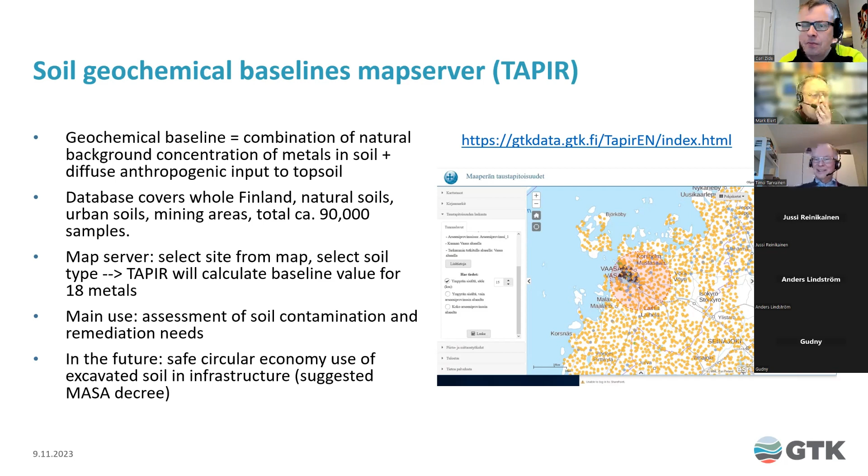But what is the number? If the program finds 30 samples around your site of interest, you will have 30 different values for arsenic, or cadmium, or nickel, or zinc, or whatever. So what is the right value? Is it the maximum or mean value?

We decided to read ISO standard 19258, and there was an appendix where they suggested to use this kind of mathematical tool, which is so simple that even I can calculate the values. I don't need Jussi for this.

So it's based on 25th and 75th percentile. And if you are familiar with box whisker plots, it's the highest value the upper whisker line can reach. So it's basically the same as upper Tukey inner fence if you use mathematical terms. And this is used as the suggested maximum acceptable baseline concentration for your study area.

So sometimes it's really the maximum value of the 30 analyses or 50 analyses, but in many cases it leaves out some outliers. And as I told, it can be used instead of the threshold value given in the decree of assessment of soil contamination and remediation needs if it's higher than the value in the decree.

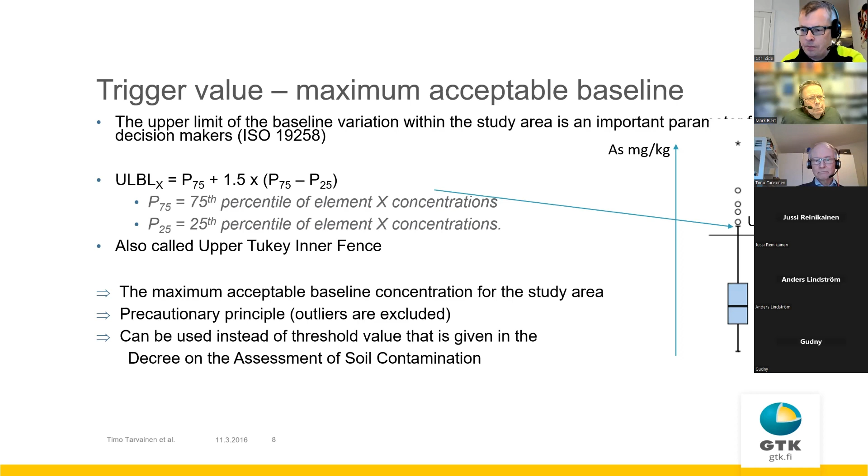And then, because in many of our cases we have been studying arsenic a lot, antimony came into my mind because antimony behaves geochemically many times a bit like arsenic. You find antimony in the same areas. And we have learned from some other projects, studying old shooting ranges, and we had a project on dredged sediments from sea which were deposited on land, that antimony was the element which was more easily mobile than many other elements.

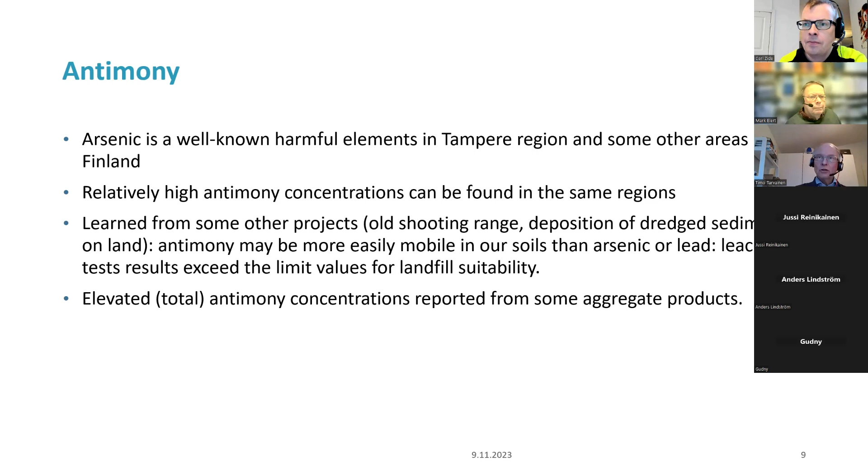So leaching tests gave higher results for antimony, so maybe you should have a closer look at antimony sometimes. And I have heard that you have antimony in some aggregate products in Finland, but I don't know any details of that. So these were some ideas picked up from our work.

We have an expert, Mika, I could give his information. He's really an expert on aggregates in general, but I was invited here as a geochemist.

Yeah. Thank you. We would love to speak to Mika, of course. Great presentation, Timo. Very interesting. And yes, the ASROCKS project is cool. And your tool, the Tapir one, is very impressive, at least compared to the Swedish one. I don't know exactly how it looks in Denmark and in Norway. So we thank you, and we will now continue to Norway and Gudny.

We have met Gudny in our circles before, and I tried to meet, of course, Gudny. I flew to Norway, but then of course she was away on a more important meeting with more important people. But I'm very pleased to have you here in this meeting, Gudny.

And I was very impressed by your ability to also get the Norwegian Environmental Protection Agency to agree to your research and do it together with them, financed by Miljødirektoratet, and that's very impressive. So welcome, and please present yourself.

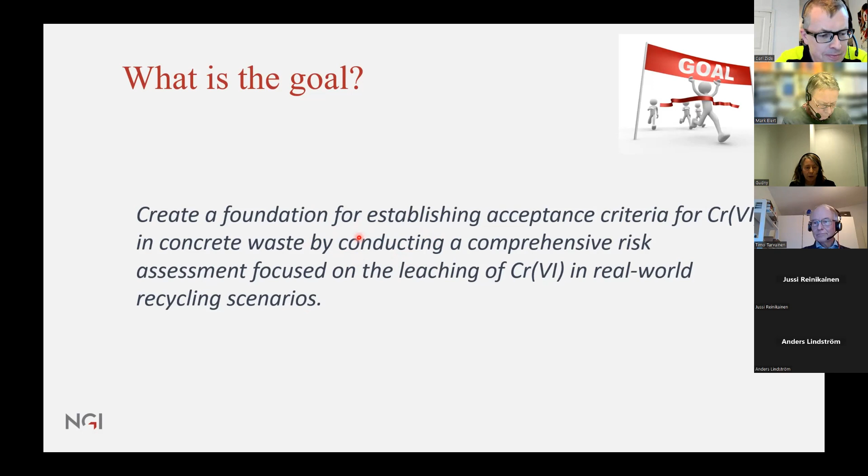So what was the goal? It was to create a foundation for establishing acceptance criteria for chromium-6 in concrete waste by conducting a comprehensive risk assessment focused on the leaching of chromium-6 in real-world recycling scenarios. So that was the agreement with the environmental authorities. And they were really an active part in this work. So we had our meetings, not often, but to discuss decisions we were taking during the work.

And it was based on a quite scientific way, because we started by gathering all the material we knew about chromium-6 in concrete and leaching and how it behaves. And there were also quite a lot of data. We also had quite comprehensive laboratory and field measurements and testing experiments. And then as the last work package, we did the risk modeling to establish a guideline value.

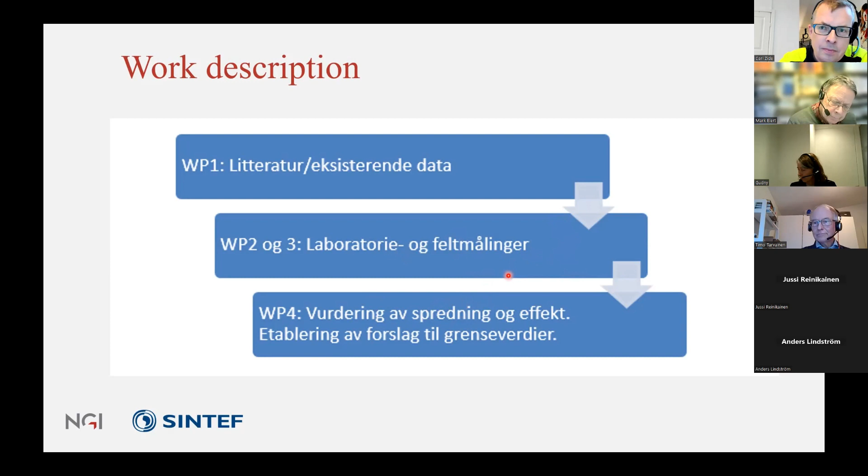And these laboratory and field experiments, they were quite important. Also, I don't remember who it was, but someone mentioned that it's not only about calculating the risk, it's also to give trust to, in this case, the environmental authorities, to also show that what we model is also what we maybe get in real life.

So we took a lot of solid samples, leaching tests, both batch and column testing. We had several field tests, like this road subbase, which SINTEF had been following since 2004. So they had a lot of data on the leaching of chromium, not chromium-6, but they continued in this project analyzing for chromium-6 also. And here they had used waste concrete as a part of the road.

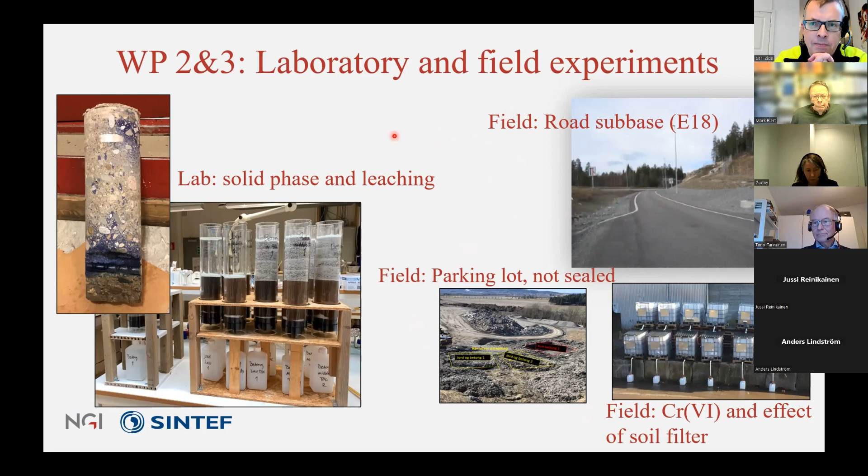We had a parking lot, or we were kind of imitating a parking lot without asphalt. And we also had some container tests at Lindum landfill site. So there were several user partners also part of this, contributing to test sites, which was of course of great interest. But just to focus on the risk assessment of chromium-6 in concrete.

So the questions in this project were: could we use the spreading leaching model, which was developed for contaminated soil, to derive a threshold value for the reuse of concrete? And which scenarios should we consider in this case? Could they be defined and simplified for our purposes? And what should be the guiding environmental objectives for evaluating this leaching to the environment? For example, limit values for surface water or groundwater?

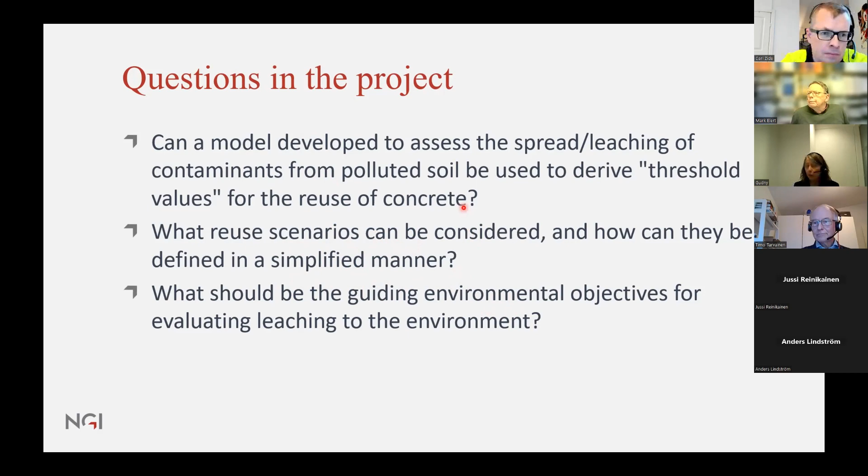So these were questions we also discussed with the environmental authorities. They had a very open line to us. What we used is a model developed for the environmental authorities by NGI, and it's developed for soil contaminant leaching, and it's also linked to the risk model. It's a simple box model where you have the contamination in the unsaturated zone. We take into account sorption, desorption, and degradation.

So it's kind of a worst case scenario because it's infiltrating directly into the groundwater. And in the groundwater, you have the transport to a recipient. Here you can also imagine that you have a groundwater well, for example. It's a limited source, so the source is depleting, and you will have a top of concentration downwards of this source. It's simple, it's 1-2 dimensional, and we don't look at contaminated surface runoff. So I think it looks very similar to the other models we have been looking at today.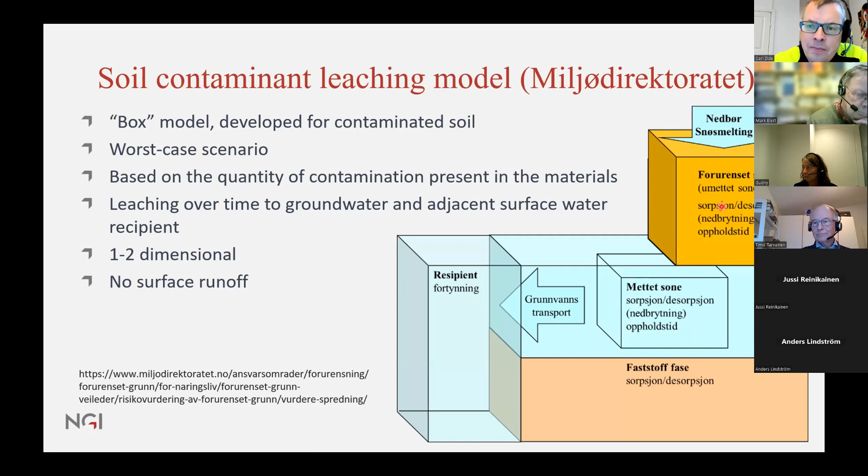And the critical parameters in the model: here, it's not a kappa value that is used, it's a KD value. Leaching from concrete is not leaching from soil, so it's a little bit different, of course. But I would say it's more conservative because you're using KD values, which are quite low in this case. But this is, of course, something which could be improved through a kappa way of describing the leaching.

The KD values we used in our modeling were 3, 30 and 300 liters per kilogram, where 30 was the default in the model from the authorities when you use it for contaminated soil. And of course, the area and the thickness are quite critical in the reuse scenario. Here we looked at the normal, very usual amount of concrete used in a reuse project, which was 10,000 cubic meters. So we adapted the length, width and thickness to this amount.

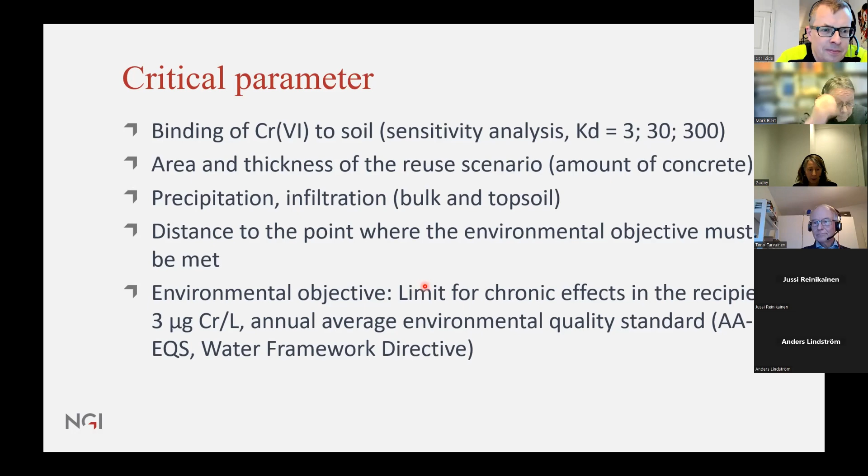Precipitation: we have a lot of precipitation in Oslo at the moment, at least. So the infiltration factor is a very important critical parameter for leaching. Distance to the point of the environmental objective recipient, which is a well or surface water. And we chose in this model the AA-EQS from the Water Framework Directive, the Norwegian value of 3 micrograms chromium per liter. That's the maximum value we can admit.

So this is, sorry for the Norwegian here, the parameter selections for the different classes. Here we see it better. For asphalt, we use a factor of 0.2, and also for concrete.

For vegetation in the noise barrier, it was a little bit higher. And for the landfill, we used quite a high one, which is 0.8. But this is also the one used by default in the model tool from the authorities.

Mark, pardon? Question from Mark. Yeah. I don't see it. Yeah, that's fine. Yes, yep.

Question: by infiltration factor, you mean that for the asphalt, 20% of the precipitation would infiltrate? Is that correct? That's correct. Okay. Maybe that's high, but you always try to be conservative, and maybe at the end you're too conservative. But I think you shouldn't expect that all your asphalt is 100% working. No. And also in future we will probably have more permeable asphalts too.

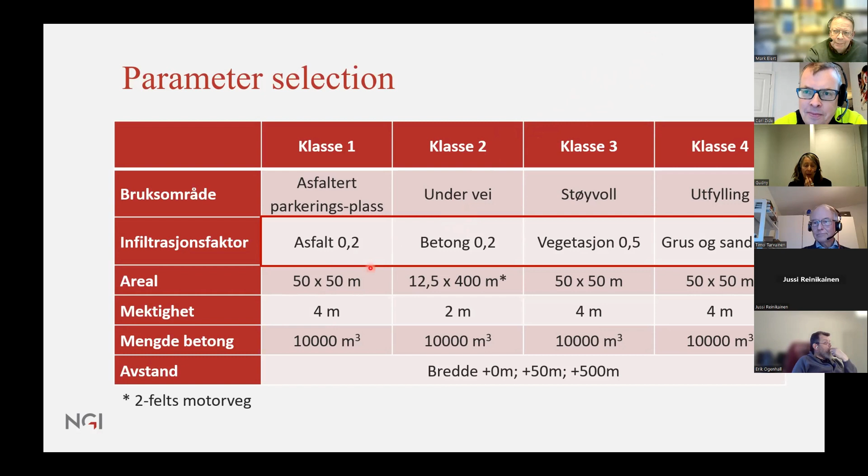The area is 50 times 50, and for this road construction it's a more narrow and longer distance. And here the thickness, if I compare to your number, Mark, is much thicker compared to yours. But as I said, it was 10,000 cubic meters of concrete, which should be kind of the same for all these scenarios.

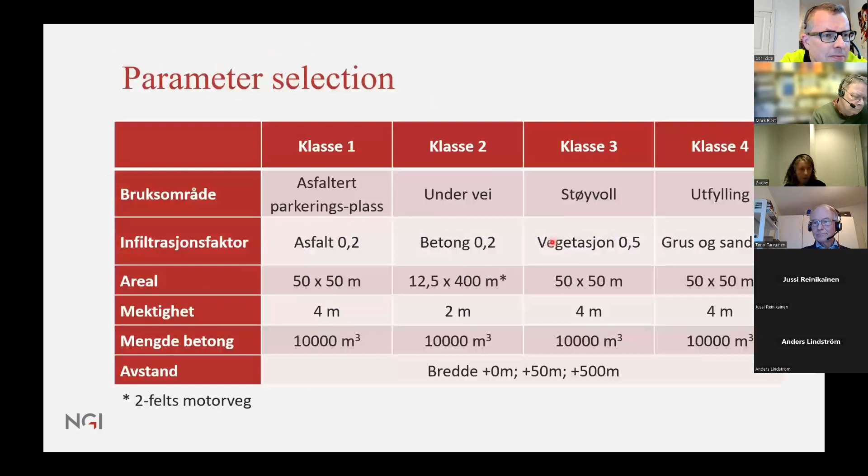Sorry. So what kind of acceptable chromium concentration did we get? If you look at when you're using the default values for the different classes, we see that it's actually the road construction which gives the lowest value. And it has to be said that for the guideline value we have in Norway today, it's 8 milligrams per kilogram. That's the solid phase, right?

So what we have calculated here is back-calculated from the maximum allowed concentration in the recipient, which was not groundwater, it was a small river. Then we get these values for these different scenarios. So we see for the road construction, this is lower than the current 8 milligrams per kilogram using default values.

But if we reduce the KD to 3, which is a very low KD value for chromium 6, but let's say that's an extreme situation, we see that all these 3 classes will be lower compared to the guideline, which is the guideline for the free use of waste concrete in Norway. But if the KD is increasing, and also the distance to the recipient, the guideline value or the acceptance criteria are also increasing.

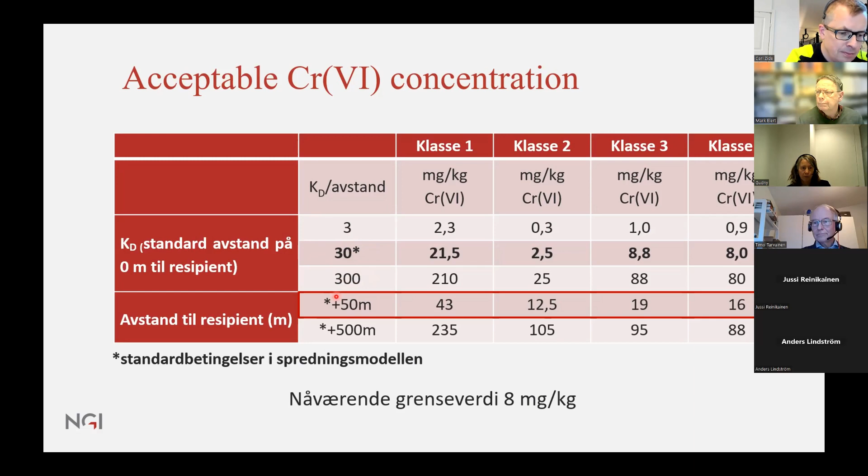So an assumption in the model, which was quite important to discuss with the authorities, is the unsaturated zone, because all the unsaturated zone consists of this material, which is leaching something, right? So this is on the one hand very conservative, but on the other hand, compared to the case we discuss here with the rock material, you could expect that maybe all the road will consist of this type of material. So maybe you should be so conservative that you expect all your road will consist of the same rock material.

We discussed this KD value, which is quite conservative, and maybe also not for concrete or for rock samples will not be. It's KD value, that's the distribution coefficient, so it's sorption, and in concrete material, and also in rock samples, it's minerals dissolving, so it's different. But maybe the kappa value would be better in this case, also for chromium 6 in concrete.

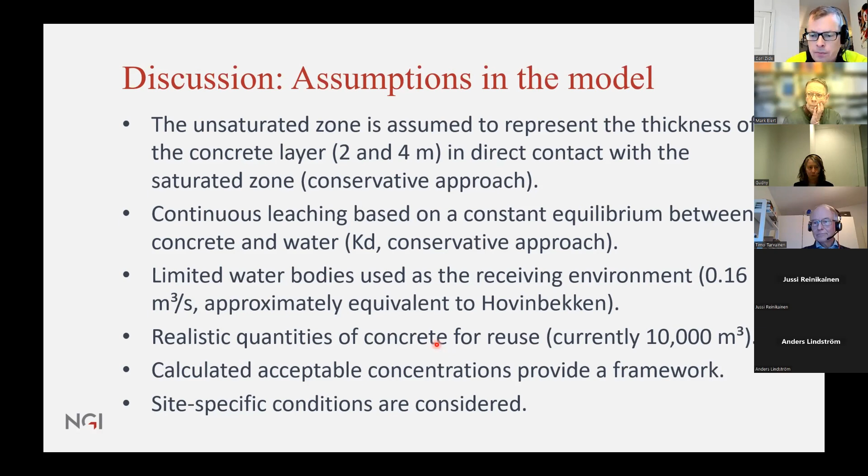I have one last one, which has nothing to do with the environmental authority project, but it's maybe interesting for you, because we have a cooperation with the Bærum Ressursbank, which is a large network in Bærum, owned by Bærum Kommune. We try to reuse surplus masses from infrastructure projects in the region, because they have a lot of material and surplus masses which should be better reused than just landfilled. So this is kind of a test cooperation where we are doing a geochemical characterization of 16 different rock samples, mainly from the Oslo region, from different infrastructure projects.

And we do solid concentrations, different methods, and we also have the standard leaching test from the waste directive, batch and column test, and we are also testing out this horizontal dynamic surface leaching test, which is more like the monolithic test, because we thought that if you reuse surplus masses from these projects, it's more realistic that you have larger stones than smaller pieces. But we also do the same test, slightly modified, with the smaller fractions, from 0 to 4 and 4 to 8 millimeter.

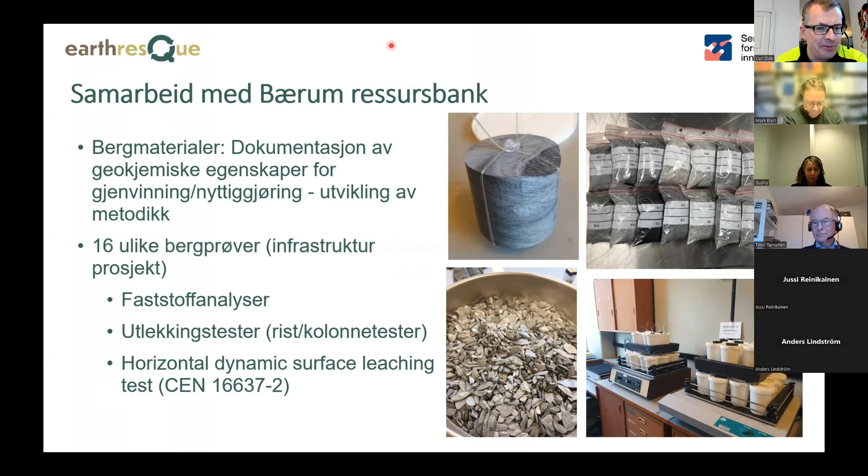Great. Thank you, Gudny. Great presentation. Very nice. So last but not least, we have Ole, who I started reading like 2-3 years ago, and he has published many reports of great importance for us. We are happy for him to be here. Please, Ole, introduce yourself and make your comments on what has been said today.

Well, thank you for inviting me. This has been extremely interesting to see these different, and then maybe not so different, approaches to risk assessment, and I hope I can get some more information from some of you on what you have presented today. I told Carl when he asked me some time ago that I would not have time to prepare a presentation, unfortunately, because this is a very busy time for us. But then, we don't have much rock in Denmark, so I couldn't say too much about the rock part of this. So instead, I've read the report, and I would like to make some comments on that, and also give some information, and you can ask me about how we do things, because I wasn't really sure what to present.

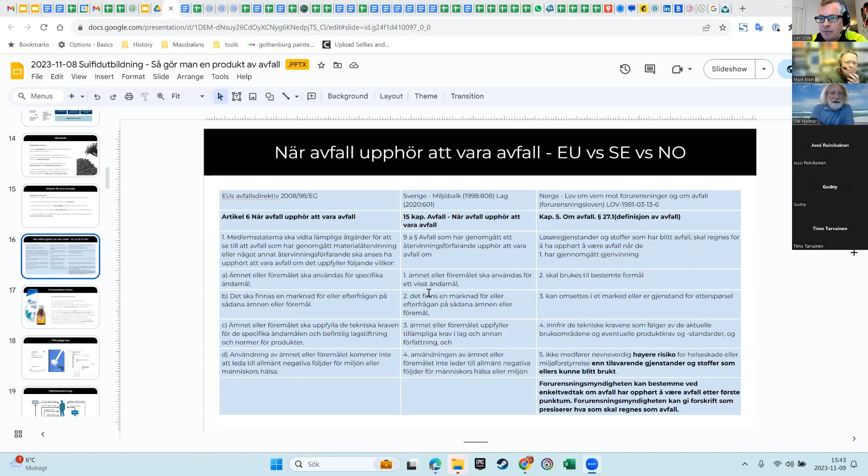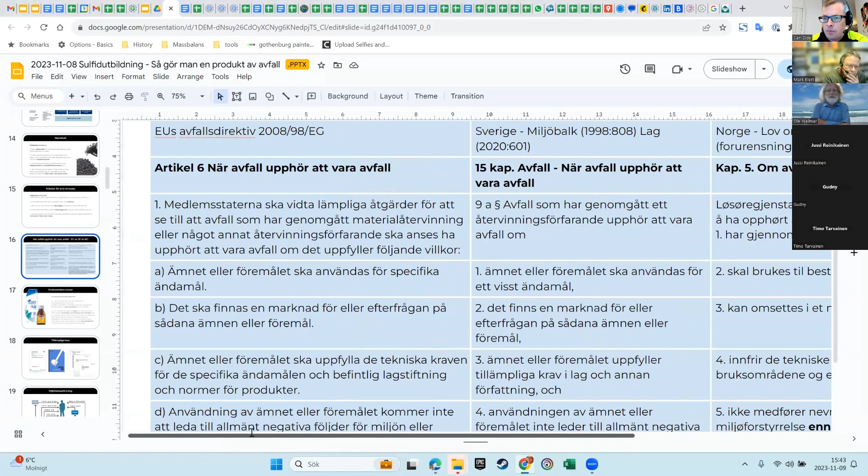Okay, that was the direct end-of-waste criteria for Europe, Sweden and Norway. I haven't included Denmark here, but I think we have the same, we just have a translation of the directive. Exactly, that's what we have as well. And here, these are the bullet points, but maybe not the thing that you should set conditions for use, which is not a bullet point. Got it. Cool.

But anyway, I could also tell you what they've done in Denmark. We don't have any guidelines on how to meet this, because in Denmark they have outsourced the responsibility for waste classification to the 98 municipalities, which is really stupid. Yeah, that sounds stupid. Because there you have 98 municipalities, and in most of these you cannot have a whole person just occupied with waste classification. No.

And this is both classification as hazardous or non-hazardous, and getting end-of-waste status. Consider what happens if one municipality gives a certain type of waste end-of-waste status, and another municipality says no, we won't classify that as end-of-waste. That's total chaos, in theory at least.